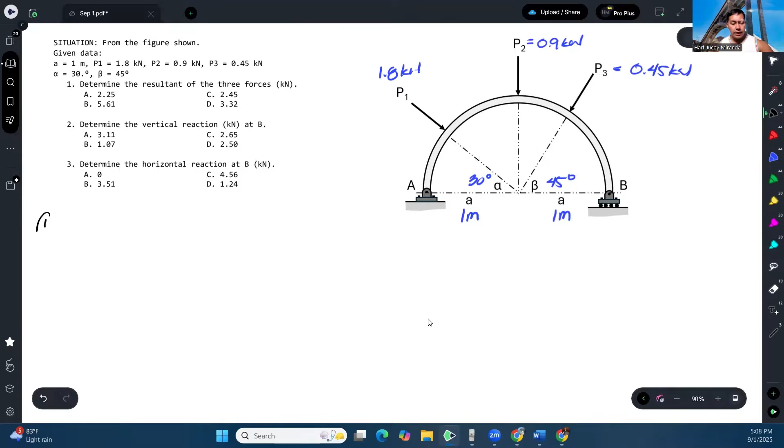So pinapahanap lang yung magnitude ng resultant. Okay? So how do we solve that? Pag resultant, number 1, kailangan mong kunin yung Rx. So x component of the resultant, summation lang lahat ng F of x or forces along x. Okay, so i-component lang muna natin lahat along x. And using the given angles, hopefully you see that yung i-assume ko to the right positive.

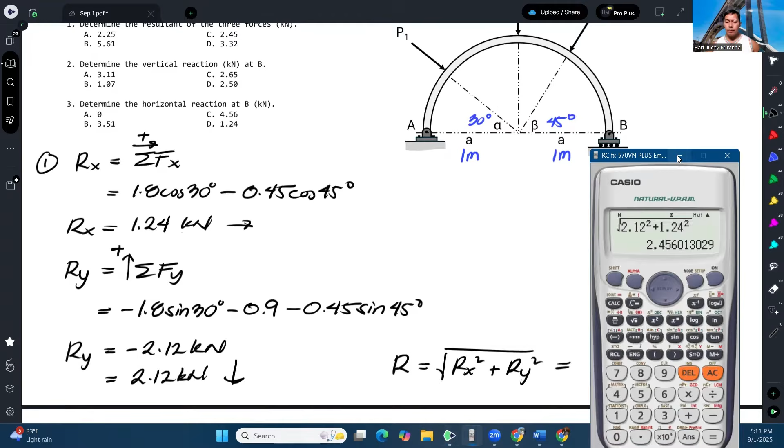Okay? So finally, the magnitude of the resultant will now be square root of Rx squared plus Ry squared. So we have square root of 2.12 squared plus 1.24 squared. So that gives us 2.45, 2.46. Nag-round off lang kasi tayo kaya medyo may discrepancy. So our answer is letter C.

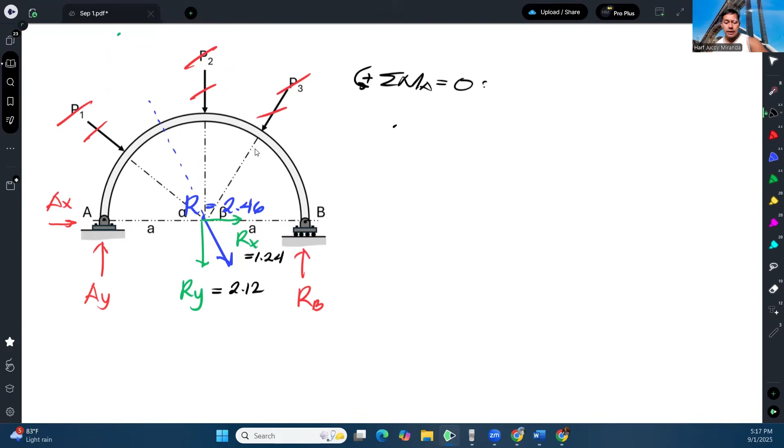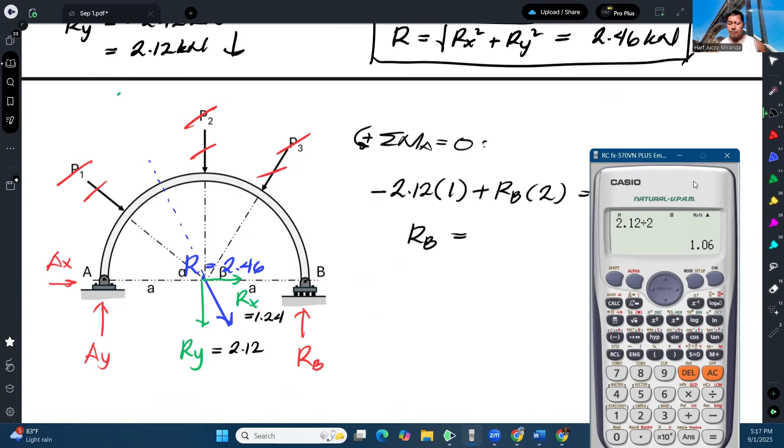And then RB, ang moment arm ay 2. Tapos counterclockwise. All equal to 0. So, therefore, you can solve for RB directly. So we have 2.12 over 2. So RB is 1.06. And that will be our answer.